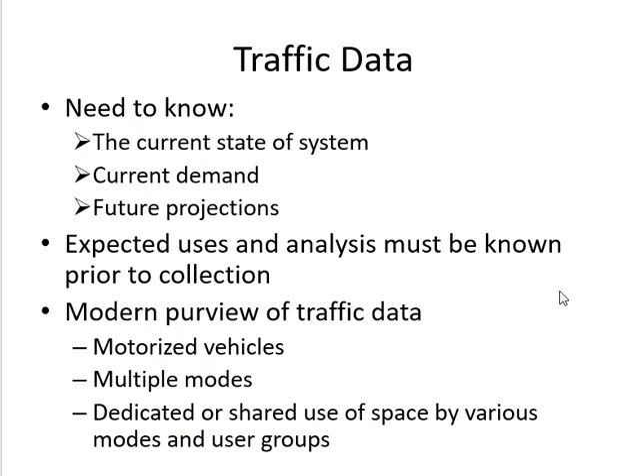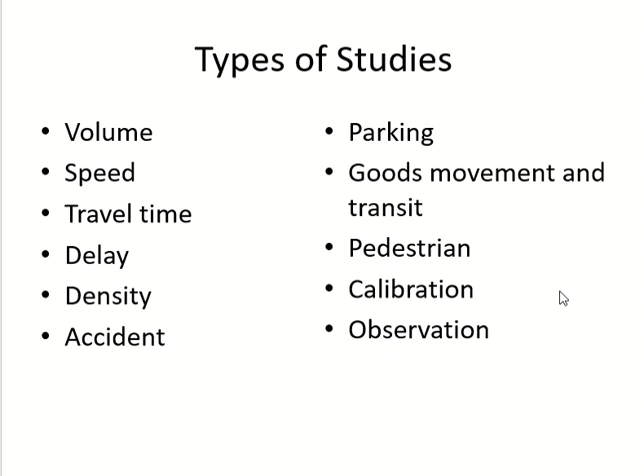Okay, yesterday we talked about different types of traffic studies which are listed here. So we talked about the three basic parameters: volume, speed, density, and then we have travel time studies, delay studies, accident, parking, the one for heavy vehicles, pedestrian calibration, and the observational studies. So we talked about all of them a little bit.

Then we said that on the basis of the technique which you are using for data collection, the study can be manual, semi-automated, or automated. If you are using a manual technique for data collection, it's a manual study. And if you are using any instrument, that can be semi-automated or automated, and we will talk about the difference between them later on.

So for manual studies, we know that they should be short, because if you prolong them, the chances of errors will be higher. So in order to restrict the source of error, we keep them shorter, and the guideline is don't make the total study more than 24 hours. Keep it less than 24 hours, but I told you yesterday that even 23 hours is not done in a single shift. So whatever number of hours you have, it is divided again so that the person is not exhausted and the error is less.

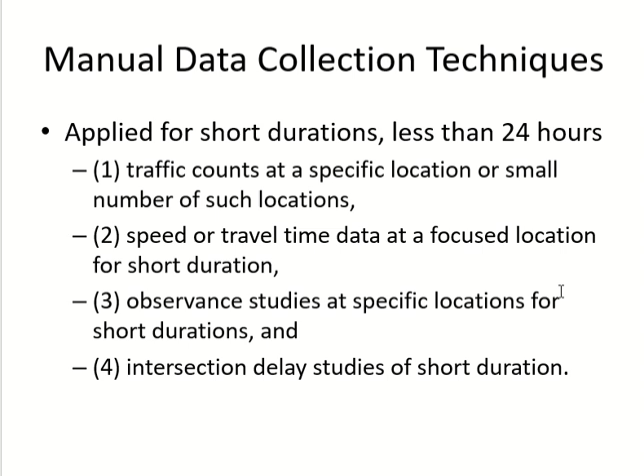What can we do manually? What data we can collect manually? We can collect data about traffic count. We can collect data for speed. We can do observational studies because they are very short and we know what we are looking for. And then we can also do delay studies of intersections because they are complicated. Later on, in some other topic, we will discuss the complete procedure.

In manual studies, you have to give time to the observer so that he or she can take care of their affairs. They're thirsty, they have to make a call, change the sheets, reset the counter, so you have to give them a break. And the break can be part of the counting period.

You tell him this is your total period, and within this total period you have 2-3 minutes of break. This is one way, and the other way is that you give him alternate counting and break periods. So he will count for 15 minutes, have a break for 15 minutes, again count for 15 minutes, break for 15 minutes, and so on and so forth.

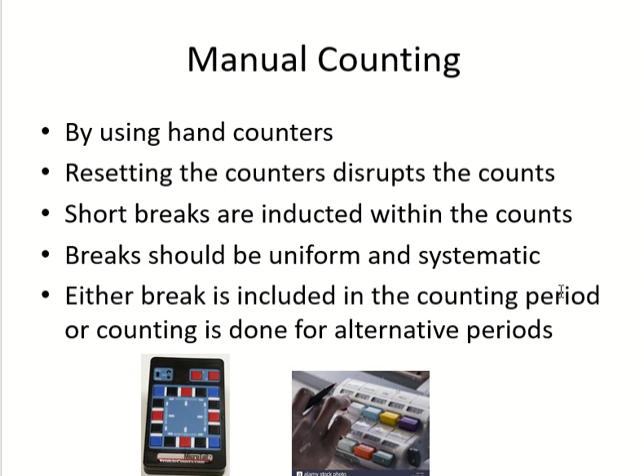If you are using the first method, which is break within the counting period, then we use the first equation to calculate the full count. He was supposed to take the count for y number of minutes, but because of the break, he took the count for x number of minutes. So if you want the full count, you take v, which is the count he is giving you for x minutes, divide by x so it becomes per minute, then multiply by y so it becomes for y number of minutes.

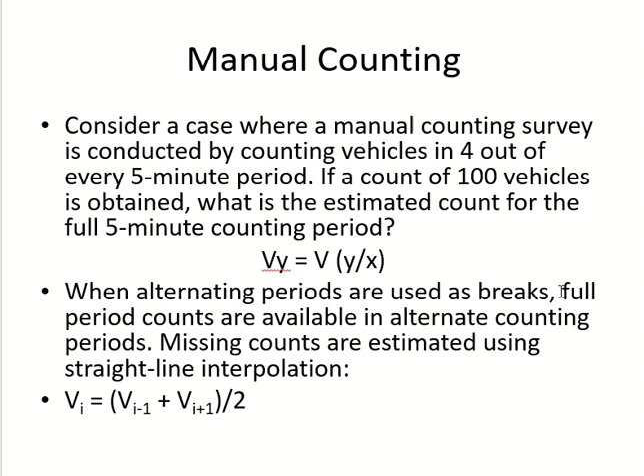And if you are giving him alternate breaks, then you use the second method, the second equation. So you already have the count before and the count after, with a break between them. To get the number in the middle, you simply take the average. Clear? Okay, then we have this example.

So in this example, if you look at the first column, we have a highway, 2 directions. The data is given for both directions. Each direction has how many lanes? 2 lanes. So we have 2 lanes in each direction and the data is taken for both directions. Now you look at the first column.

For how many minutes is the data taken? 12 minutes. So the first count starts at 4 and finishes at 4:12. When does the next count start? 4:15, right? So there's a break. Break for how many minutes? 3 minutes. In these 3 minutes you don't have any count, so it's a break.

Now, if you look at the numbers, this is what I can get from just looking at the timing, that there's a 3-minute break. If you add the 3-minute break, the total period becomes what? A 12-minute count and a 3-minute break. Total is 15, right? So the total period was 15.

And there was a break period of 3. Okay, so you have to take care of that break period.

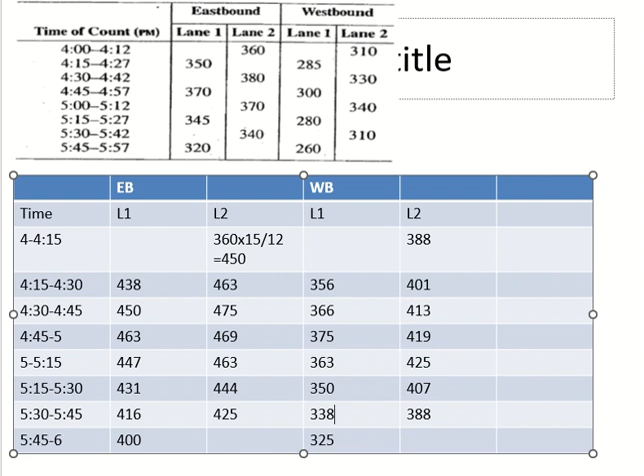426. If you want to remember it as an equation, then you can say x. So 426 is my x. And then you say a plus, a minus b. So a is this number, and b is this number. You can remember it as an equation, but I told you, it's all in the difference. You take the difference between the two numbers, whatever the difference is, you just apply it to the next one.

Okay, so the difference between these two numbers is how much now? 19. So the next number should also have the difference of 19. Plus or minus? Minus, because again you can see the numbers are decreasing. So how much is this?

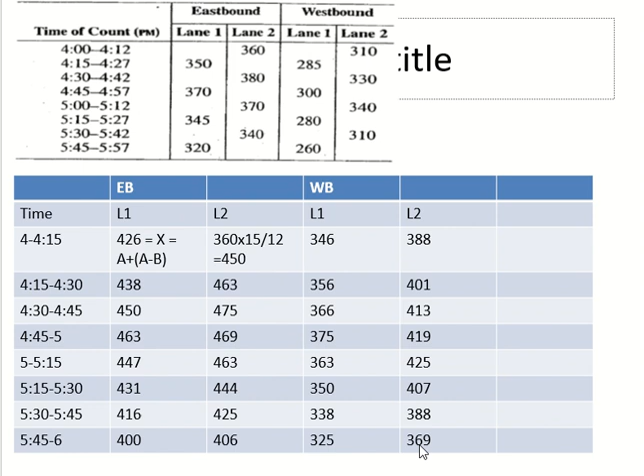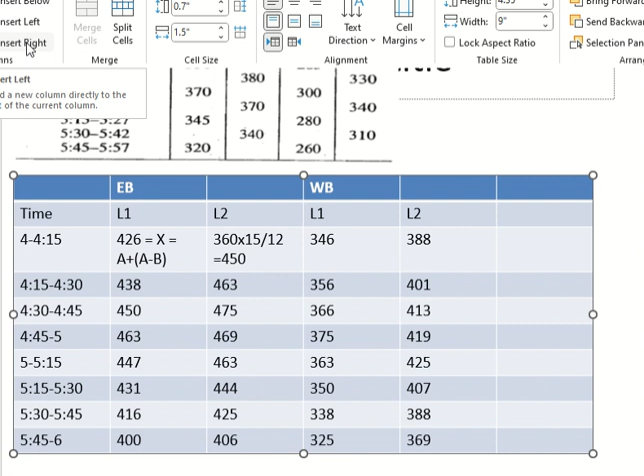Okay, now these numbers are for each lane, right? So I need to calculate for each direction. Okay, so give me the total of each direction. 876. Next. 901, 901.

Is not correct. Replace it, it is right, 925. 9. Your numbers are different, huh? Yes.

806. Okay, for the westbound: 734, 757, 779, 794, 788, 757, 726, 694.

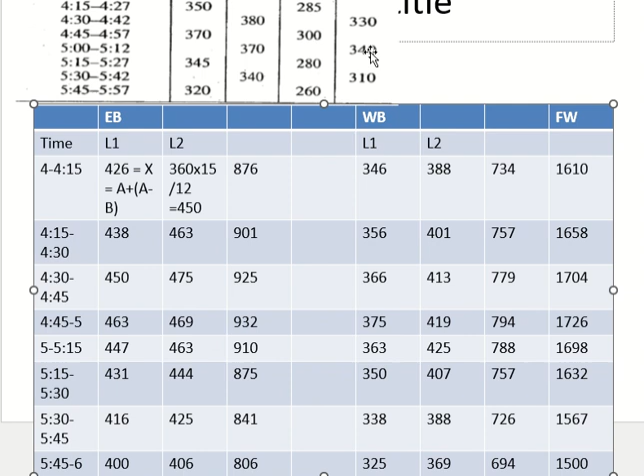Okay, so if I add the first 4 values, how much will I get? 3634, 3634. Okay, now the first 4 values, what is the time of this number? 4 to 5, right, from 4 to 5.

Okay, I can add the next 4 values. Next 4 values meaning what? These 4 values, from 901 to 910. Okay, these are also 4 values, right? Every 4 values will make an hour, right? So if you add these 4 values, how much do we get? 3668. Now what is the timing of this volume? Very good.

4:15 to 5:15. Okay, I mentioned this in the previous topic as well when you were discussing annual: annual can start from any date, but you have to complete the year. Same thing here - the hour can start from any minute, but you have to complete the hour. So it can start from 4, the hour is completed at 5. It can start from 4:15, the hour completes at 5:15. Got it? Okay, next 4 values.

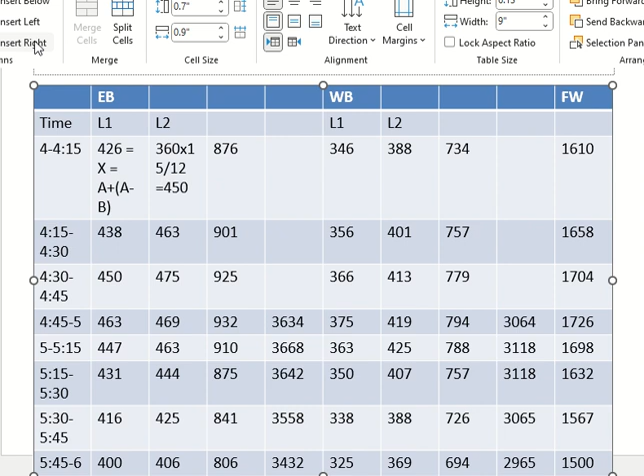Okay, and we will do the same thing for the freeway as well. For the freeway, you don't have to add 4 values - you already have for each direction, just add both directions. Okay, so 3064 plus 3634. 6698.

Next. 3118 plus 3668. 6786. What happened? You were saying something? 3118 again and 3642. 6760.

Next. 3065, 3558. 6623. Next. 2965 and 3432. 6397, 6397. Any problem up till now? Clear? Clear? Okay.

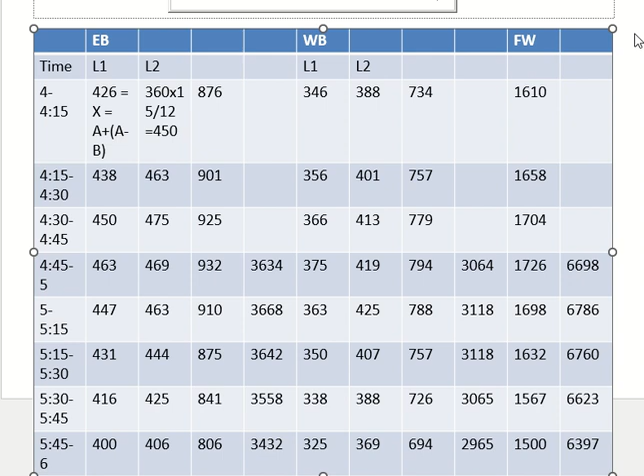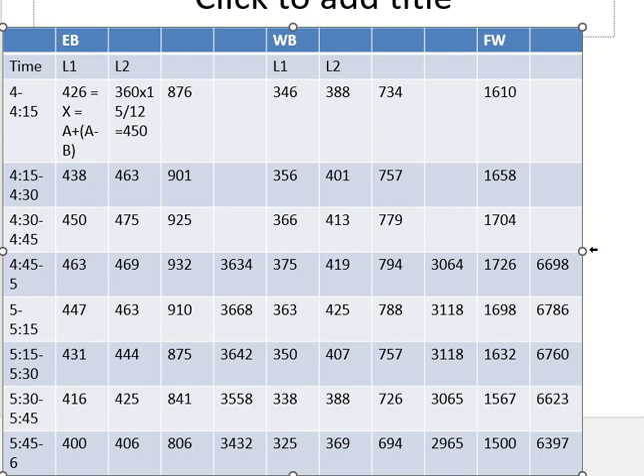Okay, now they are asking for the peak hour volume and the peak hour factor. Okay, so if I am doing it for the eastbound...

Okay, which hour has the highest volume? Tell me. Yeah, the second value, right? 3668. Okay, so the first value was from 4 to 5, the second value is 15 minutes after that: 4:15 to 5:15. Okay, so 4:15 to 5:15, what is the volume? 3668.

Okay, we also need the peak hour factor. Peak hour factor, there was an equation: V divided by 4 times VM15. Now, what is V and what is VM15? What was it? What was V and what was VM15 in the peak hour factor equation?

V is the total volume, yes. 15 minutes - flow for 15 minutes. Okay, which 15 minutes? For the peak hour, yes. But the peak hour has 4 intervals of 15 minutes, right? Average - M means what? This VM15, right, so M means what? 15 minutes is for 15 minutes. Maximum. Okay, so you will look at the 4 intervals of the peak hour and pick the value which has the maximum.

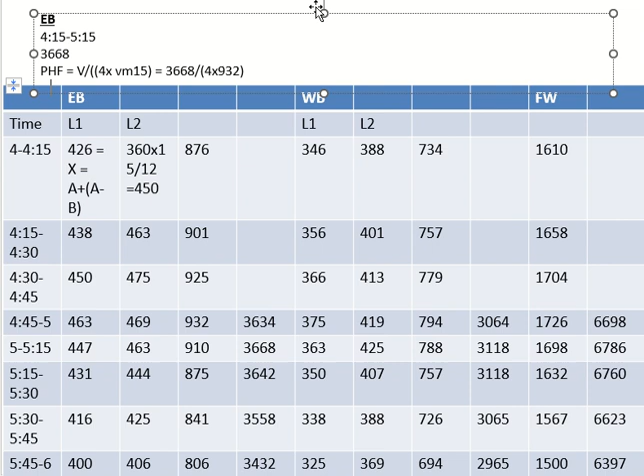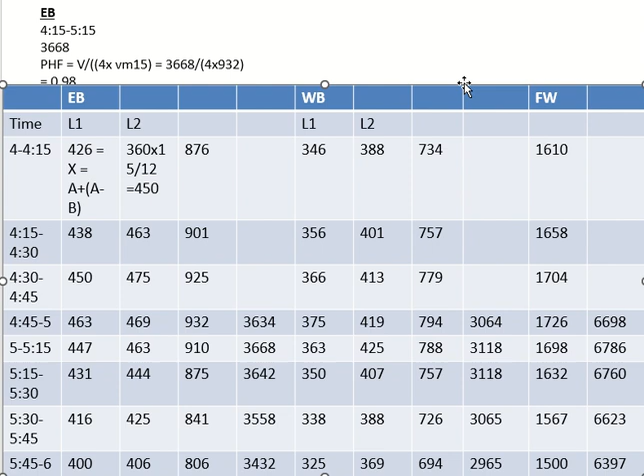Clear? Any problem? What does this value mean? The value we got, what does it mean? Which value? 0.98. What does it mean? Factor of safety. Factor of safety for what?

For peak hour. Why do we need it? If I don't include this value, what will happen?

Will have queue because of? Because of what? We did an example, right? There was an example. In that example, we did not consider the factor, and there was a queue.

But the queue happened because of the variation in the hour. This factor gives you how much variation there is in the hour. So 0.98 means very less variation. 1 is the perfect value. 0.98 means very less variation. But we consider it in the design.

If you don't consider it in the design, if you use the design volume without the peak hour factor, you will have a queue. Within the hour, there will be a 15-minute interval which will generate the queue. And you are not sure whether this queue will remain till the end or not.

For more details, go back to the example we did in the first chapter. After that, there was peak hour factor. For westbound, which volume is the highest? There are 2 values. If this is the case, you can pick any value, no problem.

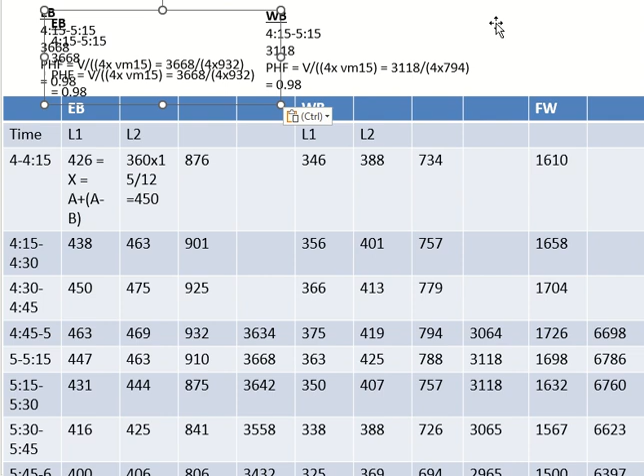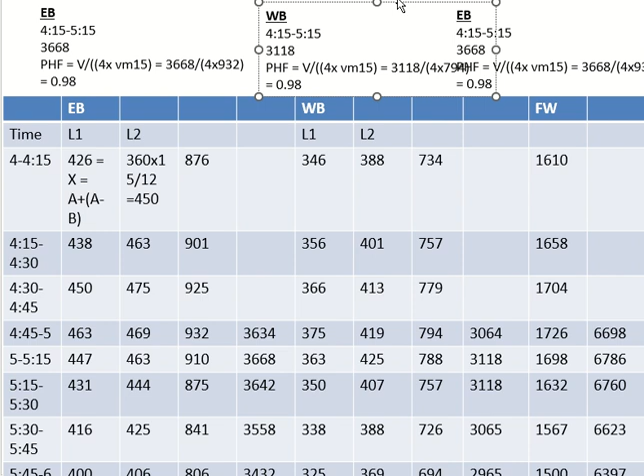Two decimals. For the freeway, where is the maximum? 6786, right? Six, seven, eight, six. The highest flow is 1726. And the value is the same.

Now each direction has its own numbers. So the peak hour factor can be different. The values are different. The volume is different. The maximum flow is different. But the peak hour factor and the time of the peak hour can also be different. Each direction can have a different peak hour, no problem. There is no rule that both directions will have the same peak hour or the same peak hour factor.

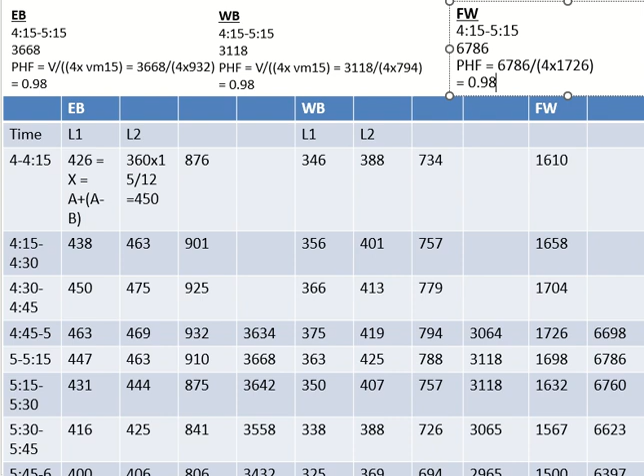Okay, now look at the last one, last part C.

Okay, they're asking for flow rate. What is the flow rate? Flow turned into conversion to hour, flow turned into per hour.

Okay, flow is for 15 minutes in this case. When you convert it to per hour, it becomes flow rate. So you can take the value of each 15 minutes and convert it to its flow rate. In this case, each value is for 15 minutes. If I want to convert it to flow rate, I will do what?

Multiply by 4. Each hour has 4 intervals, right? So they are just asking to do it for each direction. You take the value for each direction, which you already calculated here, this column, and this one. So you pick each value from these columns, multiply by 4. Easy, clear? Okay, these are the values.

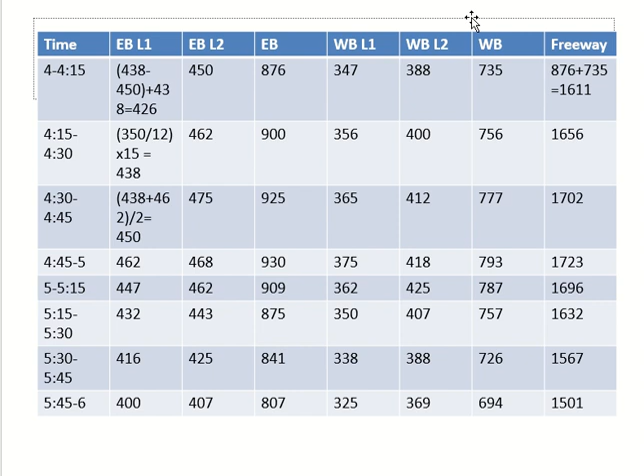You may have some differences, plus minus 1 or 2 here and there, because of the rounding off, plus minus 1 or 2 in the last digit is okay. The number is 876, you are getting 776, you say no, it's plus 1 or minus 1. No, it's the first digit, so it becomes plus 100. So this is not allowed. Clear? Okay.

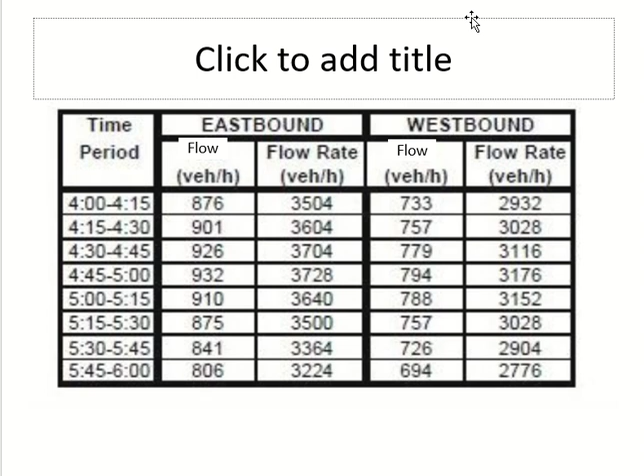Okay, so we are talking about manual studies. Manually, we can also do speed studies as well. If you are doing a speed study manually, then what do you use?

Yeah, so you will have a stopwatch, and then you need a distance as well. The distance, or the part in which you measure the distance and time, that part of the road is called a trap.

Okay, it's called a trap. So the car enters the trap and you record its time, then you do distance upon time. Clear enough? We can also do manual studies using speed guns or speed radars. These speed guns or radars can be handheld, you keep them in your hand, or you can install it on a stand. But if you are using the radar, then why do we call it manual?

Because they are operated manually, same as stopwatch. Stopwatch is a device, right? But you have to operate it, it will not record the time by itself. So if you have a speed gun or a radar which you have to operate, the car passes in front of the radar and it does not record. You have to press some button, you have to do something, and then it will record. So it's still manual. If you are using a device that needs manual operation, we will still count it as a manual study. It is still a manual technique.

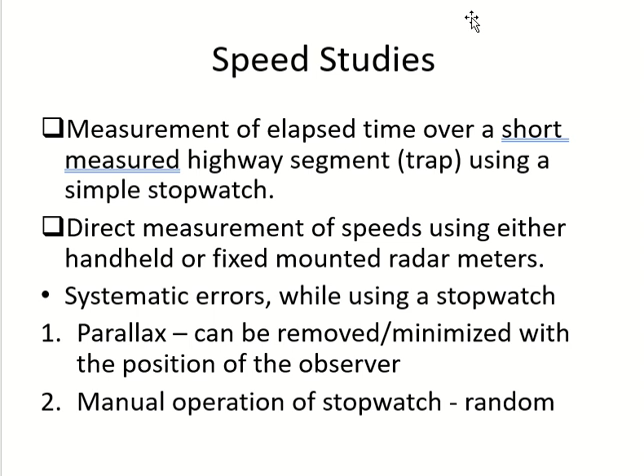What is a parallax error? Parallax is related to the line of sight of the observer. So you may have also heard about it in surveying, but you don't remember, which is very good. So parallax error happens because of the line of sight of the observer.

How does it happen? You look at the top point on the picture here, that is the position of the observer. And you look at the line, that is the entry line of the trap. So he is looking at the entry point direct, straight.

But when he looks at the exit point, his line of sight is not straight, it's inclined. So when he is looking at something straight and an object comes in this line of sight, he exactly knows where the object is. But when you are looking at something with inclined line of sight, there's a little bit of error in what you are seeing and what is the exact location of the object. This is called parallax.

So when the car is here actually, but according to his line of sight, the car and the exit point are aligned. So according to this alignment, the car for the observer has reached the exit point. This is the parallax error.

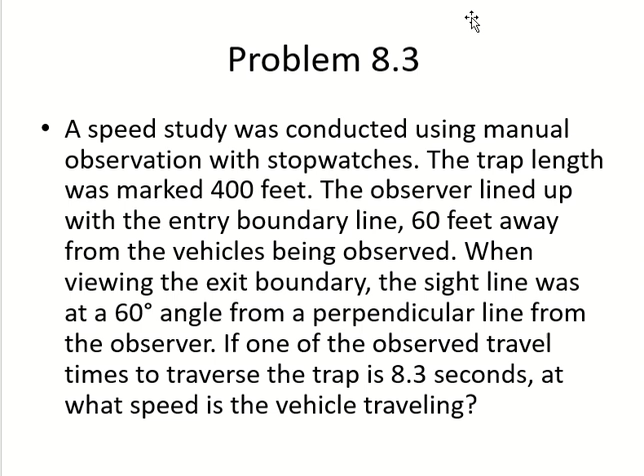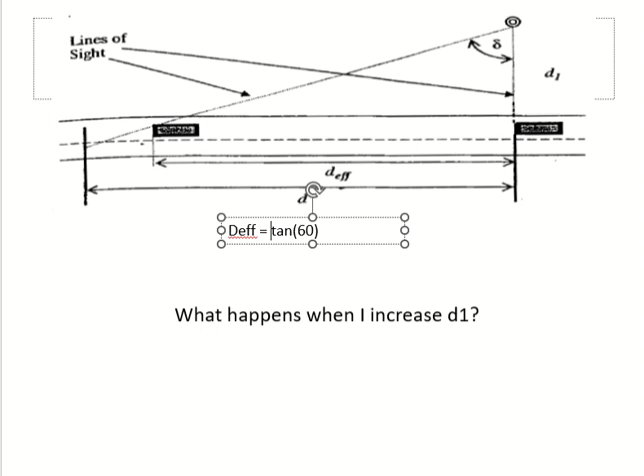Now this observer from this position records a time of 8.3 seconds for a car. Now, in 8.3 seconds, the car crossed how much distance? Tell me, D effective. So if I want to find out D effective, then I will use tan, right? So how much is D effective?

And if this is the distance, then how much is the speed? How much time did he give us? 8.3 seconds, right? So 103.9 is the distance, and the time is 8.3 seconds. How much is this? This is for the time being, feet per second. We are not required to do any conversion, so this is it.

Now if you want to cancel out the effect of the parallax, then D effective should be equal to D, right? Yes. So you have the equation. You can see which values will make them equal, D effective and D. You can play around with this equation and see which values should I put here to make D equal to D effective. It will cancel out the effect of parallax.

Whatever the distance is, that's what we are observing. But you have to look at the practical aspect as well. Maybe you will come out with D1 equals to 1000 feet, and then you don't have the space on the road to stand 1000 feet behind. Or the angle comes out to be more than 90, you cannot have it. So you have to keep these things in mind.

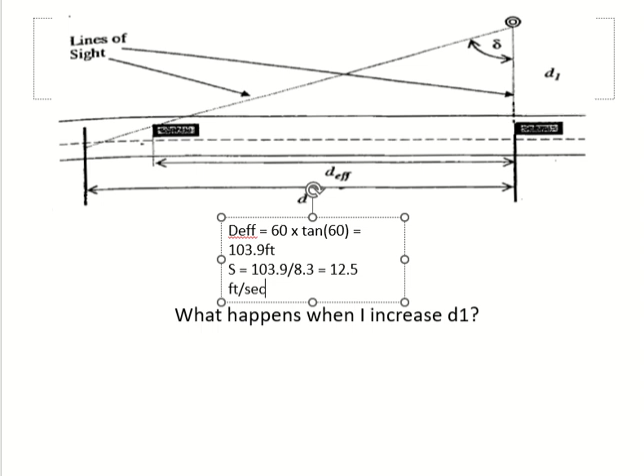How do we measure the angle? You fix your position from where you will stand. And from this position, take a theodolite and point it towards the exit point. You will get the angle. Clear? Any other question?